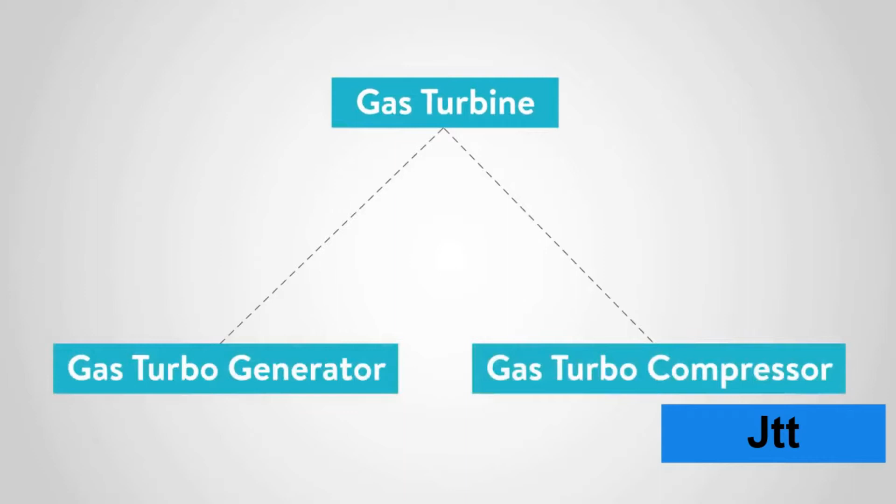Two of the most common applications of gas turbines in modern industries are turbogenerators and turbocompressors. I'll try to approach a gas turbogenerator, or GTG, to better feel the subject.

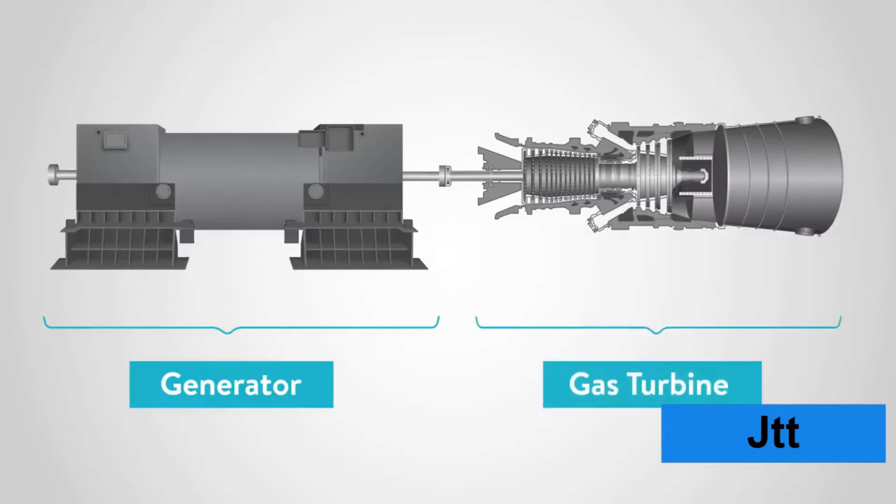In a turbine power plant, there's a generator, which is an electrical machine. But to generate electricity, this generator needs a prime mover, which for my example is a gas turbine. The gas turbine transforms the chemical energy in the fuel, for example natural gas or similar fuel, into mechanical energy. This mechanical energy generated by the turbine exit shaft is then transferred through a gearbox to the generator's shaft. Now my generator can create electrical energy.

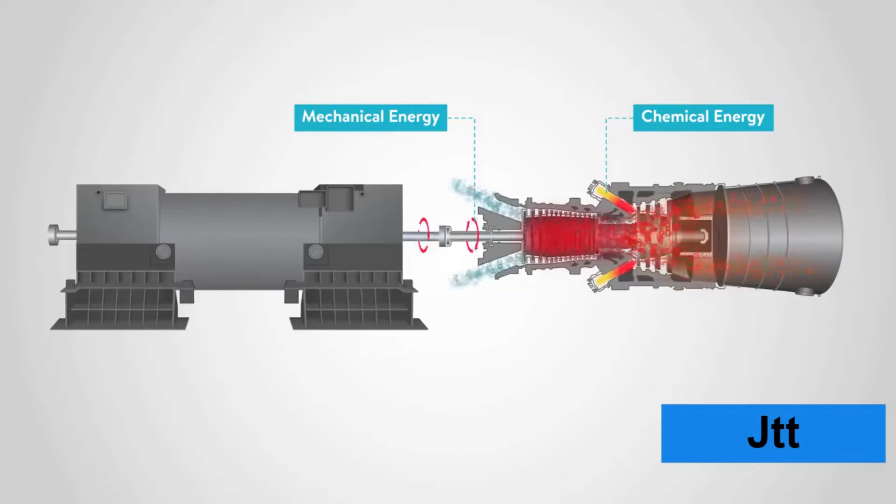This primitive form of electrical energy normally has a low or medium level of voltage, and to better manage the power loss in transmission lines, this voltage should be increased by step-up transformers. Such transformers give an adequate level of voltage to the electrical energy to be transmitted through the transmission lines and delivered to the grid.

After this brief overview of a sample gas turbine application, I'm going to dig down into the gas turbine mechanism in more detail.

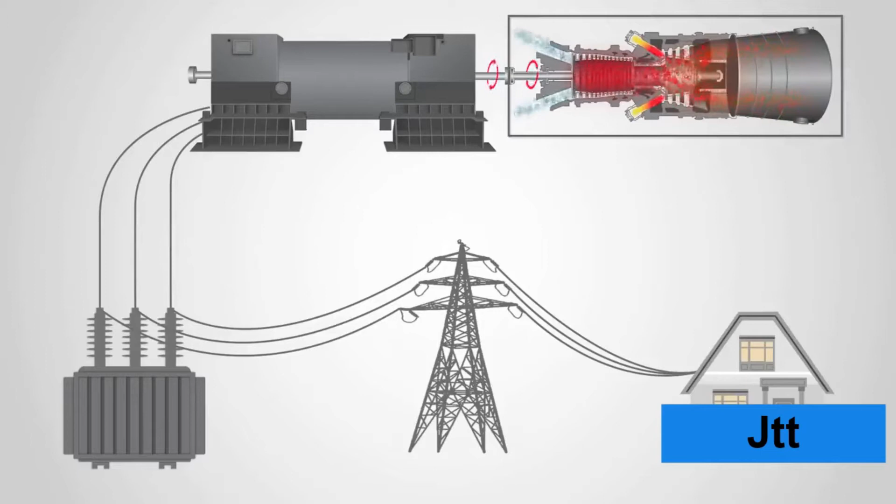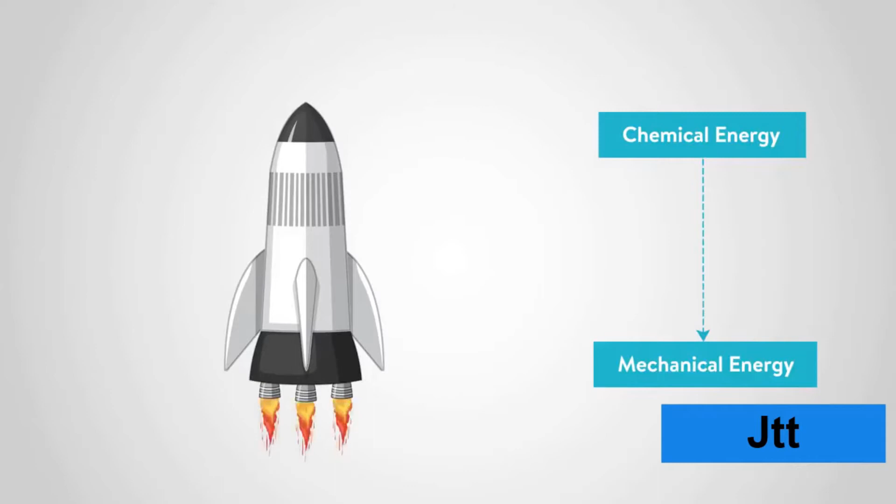First, imagine a rocket in which some fuel is going to burn and create a high-pressure exhaust gas. Based on the energy conservation law, the chemical energy of the fuel is transformed into mechanical energy in the high-pressure exhaust gas. When a rocket is fired, the thrust of this exhaust gas moves the rocket forward. This amount of rocket science is enough for me.

Now suppose I fix the rocket body with a robust mechanical structure to prevent its movement. What will happen? The high-pressure exhaust gas should be released, and it will have no way but backward.

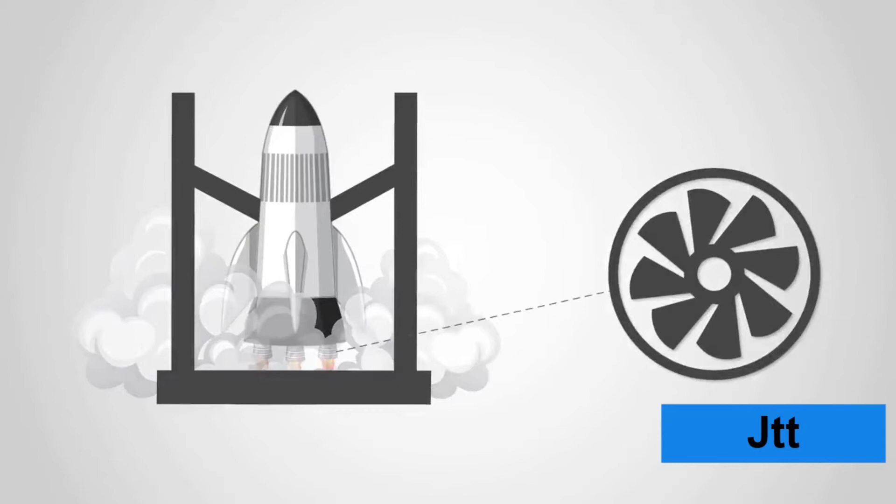Now keep this structure in mind, and imagine I put a set of turbine blades in the path of this high-pressure backfired exhaust. You see that the release of mechanical energy, which is mostly in a linear backward direction, will mostly transform into a kind of rotational movement of the turbine shaft. So far I'd say it's a big success, in that we've transformed the chemical energy of fuel gas into rotational mechanical energy of the turbine shaft.

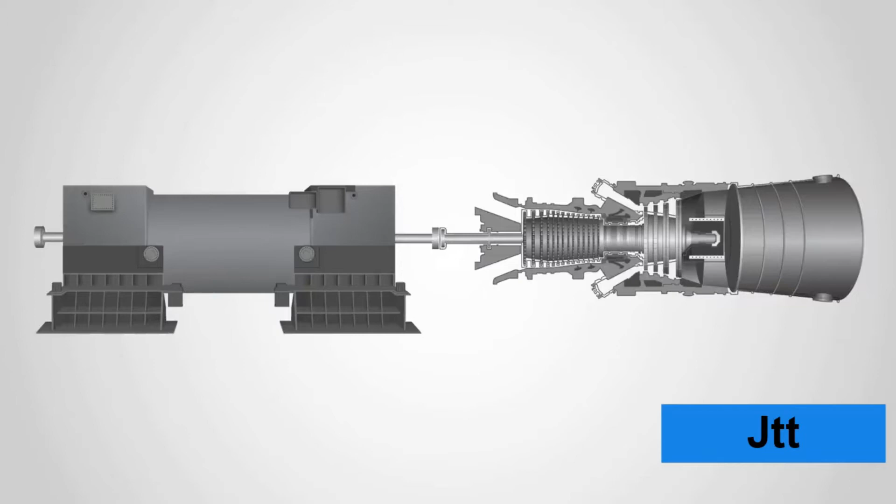Now I have a prime mover for my generator in the above power plant example. Also, this prime mover concept can be used in different applications like turbocompressors or the like.

Now that I have the basics of gas turbines, let's focus on a modern gas turbine and its components. Most likely you know about the fire triangle or combustion triangle, which illustrates the necessary ingredients of fire or combustion: fuel, air, and heat.

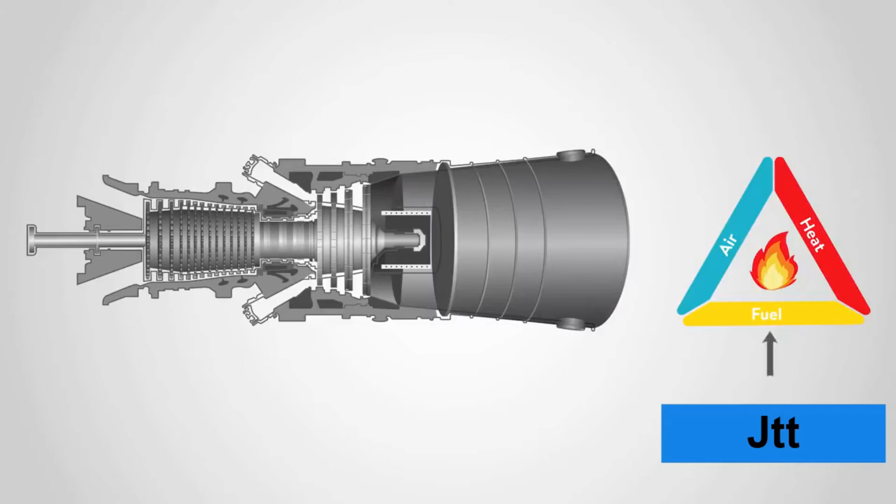To transform the chemical energy of the fuel gas into mechanical energy, the fuel should be burnt in the combustion chamber of a gas turbine. So I need air and heat added to the fuel.

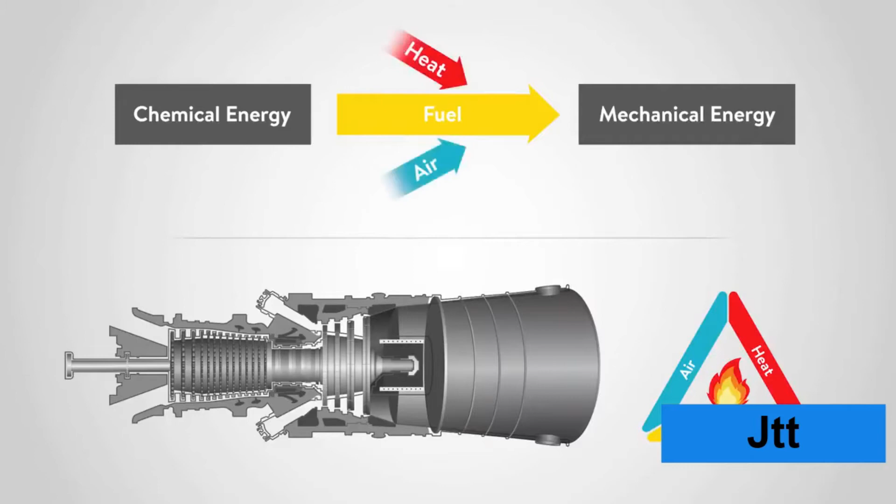Air is let into the gas turbine through an air intake and mixed with a proper amount of natural gas. The air-gas ratio is determined based on the specific heating value of the gas and quality of the air, amount of moisture, altitude from sea level, and so on.

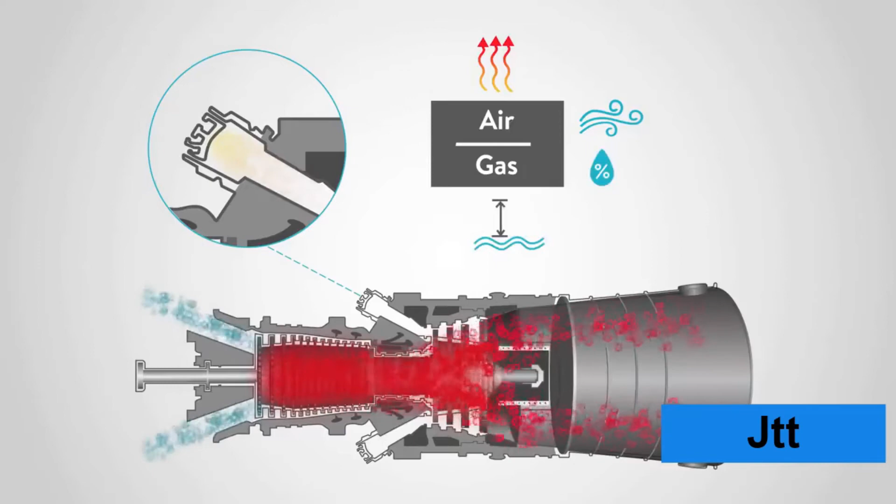Now an ignition system steps in and makes the initial sparks, whereby heat is provided. When the fire is established and stabilized in the combustion chamber, the ignition system will be put out of service.

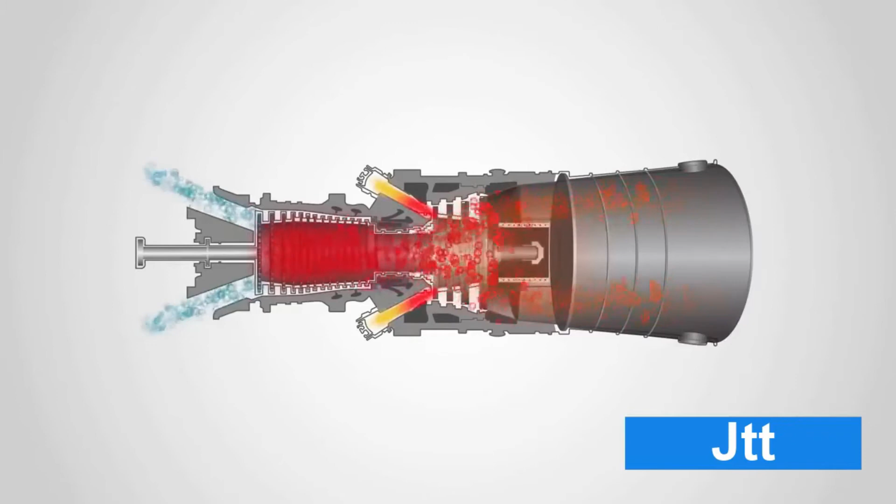The most critical process in normal turbine operation is to manage the combustion and produce a proper amount of high-pressure exhaust gas. This exhaust gas is applied to the turbine blades, and after rotating the turbine shaft, conducted to the exhaust stack. With this quick review of key components of a gas turbine, I think it's time to decrease the altitude and elaborate on the system further.

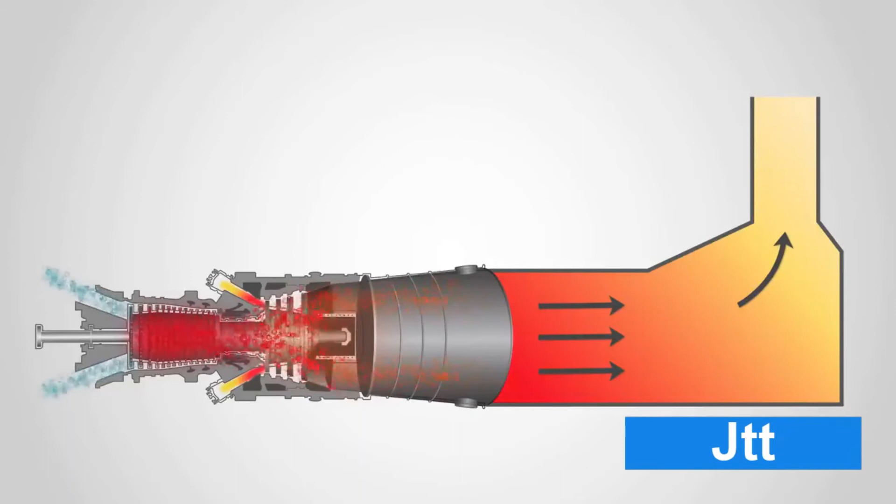As I mentioned earlier, air is let into the gas turbine through an air intake. The air is prone to contamination or having some unwanted particles which can harm the system and degrade the overall performance. Screening and filtration are basic requirements for incoming air.

Also, proper instrumentation is mounted on the air duct to monitor the draft pressure and temperature. In harsh environments, the air might need to be preheated or conditioned. Also, differential pressure monitoring of air filters will warn the turbine operator of filter clogging.

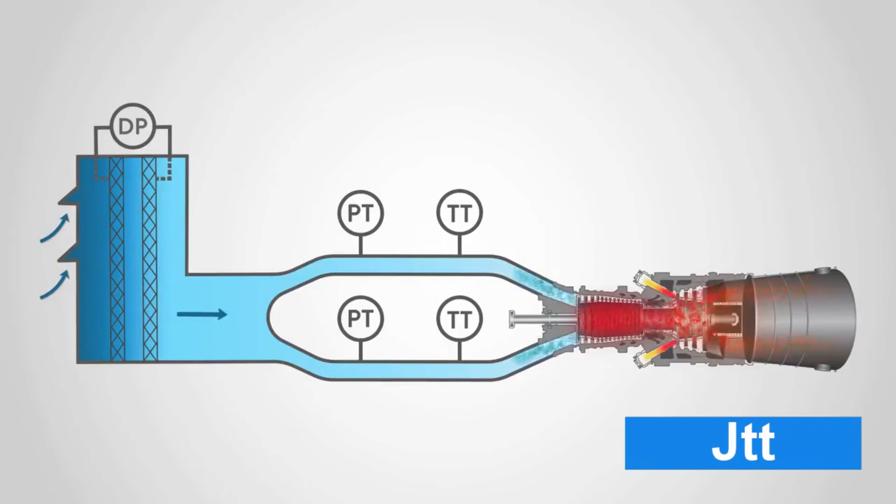The conditioned air is conducted into the turbine air compressor, which is an axial compressor comprised of multi-stages of blades mounted radially on the turbine inlet shaft. The discharge pressure and temperature of the air compressor are monitored to manage the combustion quality at the combustion chamber.

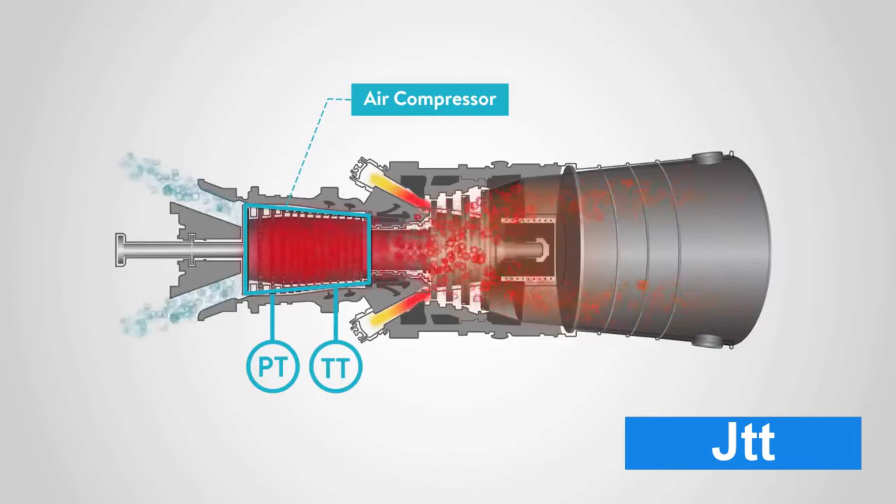Fuel gas is a key factor in the design and operation of a gas turbine. The manufacturers need to know the details of the fuel gas, and only based on its characteristics can they guarantee the performance of their gas turbines.

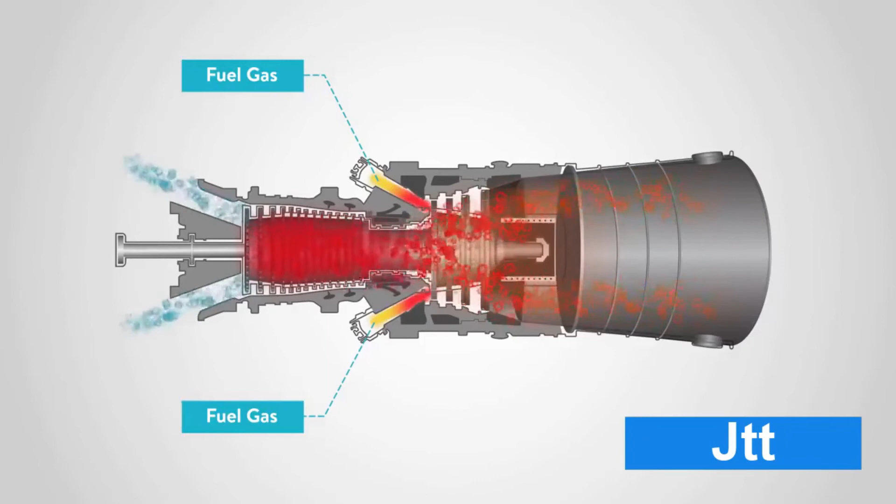Also, the pressure and temperature of fuel gas are monitored during normal operation of a gas turbine. There are different technologies in properly mixing the air and gas and making efficient combustion from manufacturer to manufacturer.

Combustion chambers are tubular heat-resistant structures, and fuel is usually injected into them from the circumference and at different cross-sectional locations. The temperatures at different locations of the combustion chamber are thoroughly monitored by means of proper sensors like thermocouples.

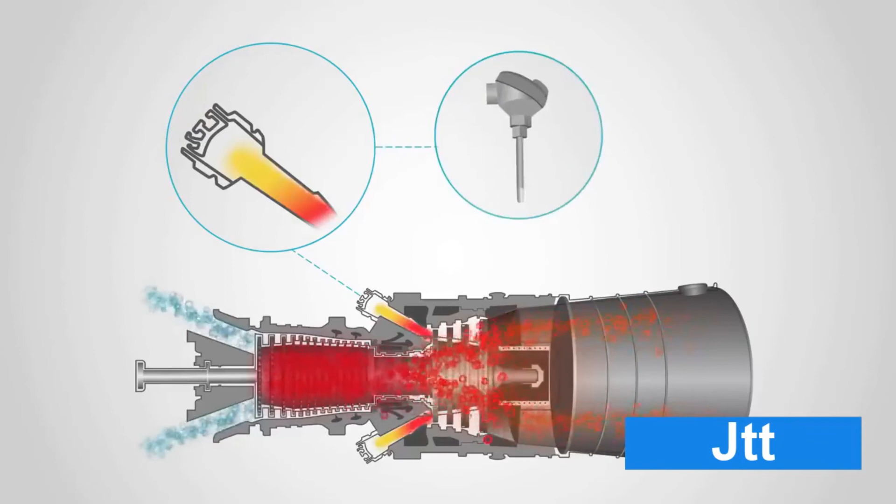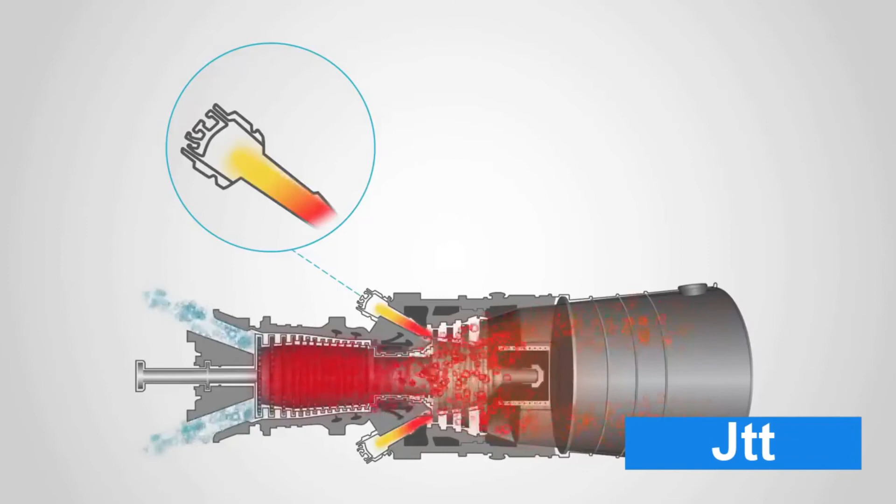This high-temperature, high-pressure zone in a gas turbine structure is of the highest levels of importance to monitor and control. Also, the technologies used in the design and construction of the combustion chamber are of the topmost ones.

Now that the air-gas mixing is well managed and combustion is going on properly, there is plenty of high-pressure, high-temperature exhaust gas generated and should be applied to the gas turbine blades to make turbine exit shaft rotation feasible.

At this stage, the high RPM of the gas turbine rotor should be tightly monitored, and based on the load driven by the turbine, the surge of the turbine gets the topmost importance for turbine performance and turbine protection.

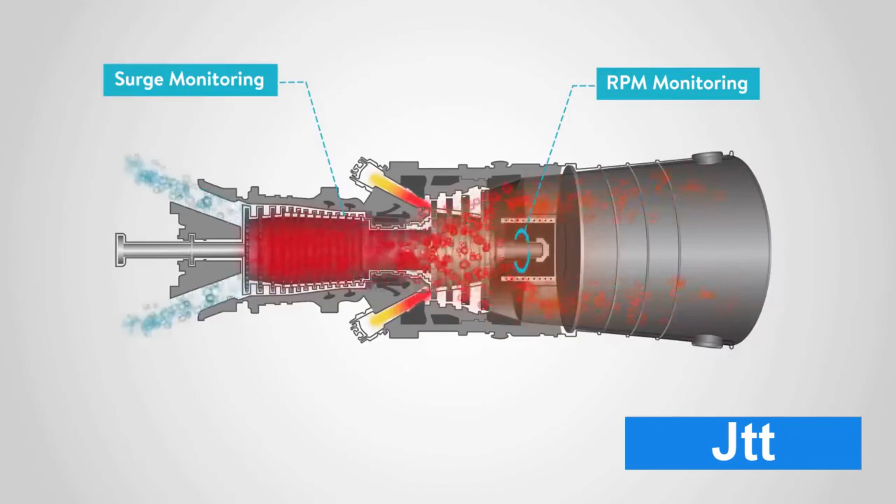Vibrations, axial and radial, and speeds, both at the air compressor and gas turbine, should be continuously taken into consideration.

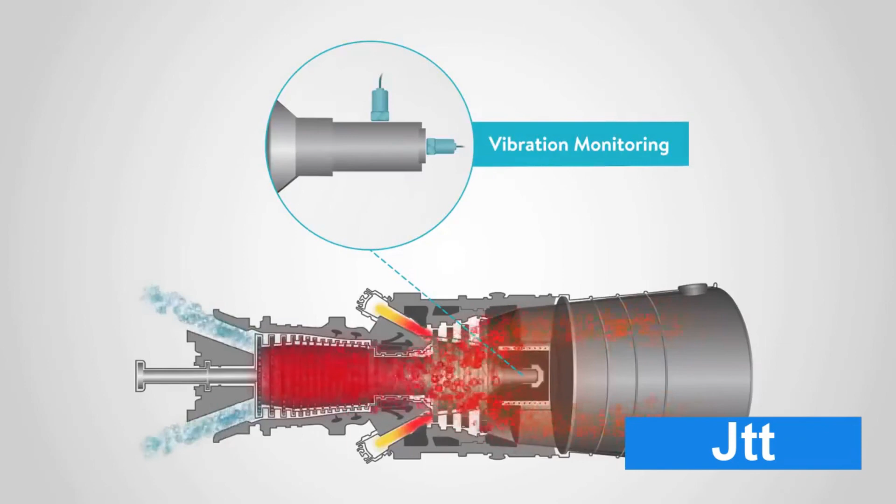This was the simplest way to address major parts of gas turbines, and as one of the most sophisticated man-made machines, a gas turbine deserves more elaboration. Also, there are different technologies which some manufacturers use as their proprietary technology, and were not considered in this video.